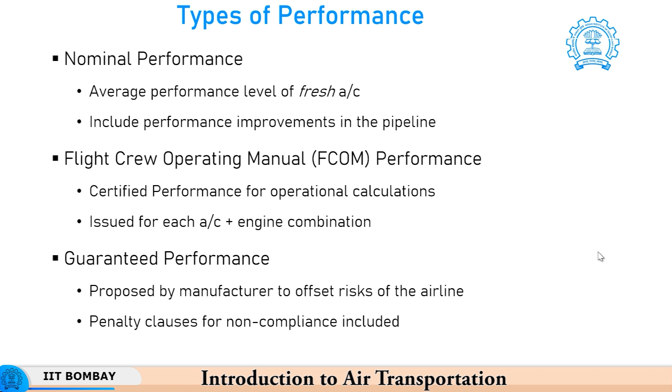Let us look at how these two types of performances are related and what is done. If you look at critical performance, there are certain parameters. When we calculate the critical performance of the aircraft, we assume the aircraft to be full with 100% load factor, the payload also full with the maximum certified payload, the cargo also completely full, and the ambient wind and outside air temperature, abbreviated OAT, to be about the 85th percentile.

You look at the data over a large period of time and pick the ambient wind and OAT that is almost always present around 85% of the time. With this assumption, we calculate the critical performance. But if you want to calculate the average performance, that is essentially to demonstrate the ability or capabilities of the aircraft in average operating conditions. There we assume the load factor to be 75% both for passengers and payload, only half the cargo is carried, and the winds are within the 50th percentile.

So when the critical performance is mentioned, we assume the most critical conditions, and when the average performance is mentioned, we use these average conditions.

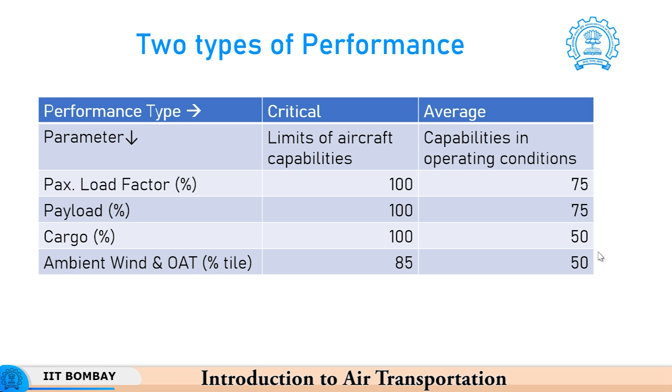Let us have a look at what is the effect of the en route conditions on the performance of an aircraft. One very common occurrence is that the outside air temperature may increase above the standard ISA conditions. So as the OAT increases, the engine performance goes down and the climb rate of the aircraft also is reduced.

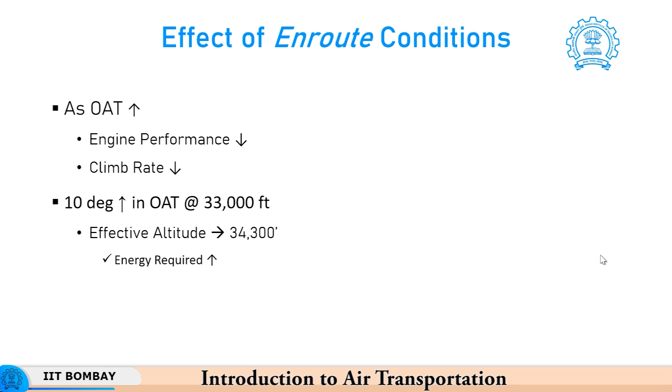A very rough idea is that suppose you have a 10 degree increase in the outside air temperature at the operating altitude of 33,000 feet, then effectively the aircraft has to climb to a height of 34,300 feet. So the notional increase in the altitude to be climbed is 1,300 feet. In other words, the energy required by the aircraft when it operates at 33,000 feet in a condition when the outside air temperature is 10 degrees more than the nominal ISA value, is equivalent to expecting the aircraft to climb to a height of 34,300 feet.

Now during climb also there are issues. As the ambient velocity increases during the climb, the angle of attack during climb, alpha climb, and the flight path angle are a bit different. The flight path angle is the angle of the aircraft related to the flight profile, and alpha climb is the net angle at which the aircraft is climbing. Both of them increase, so you have to climb at a higher angle, and when you climb at a higher angle, the distance required on the ground to complete the climb also increases. So the climb will take longer if the ambient velocity increases.

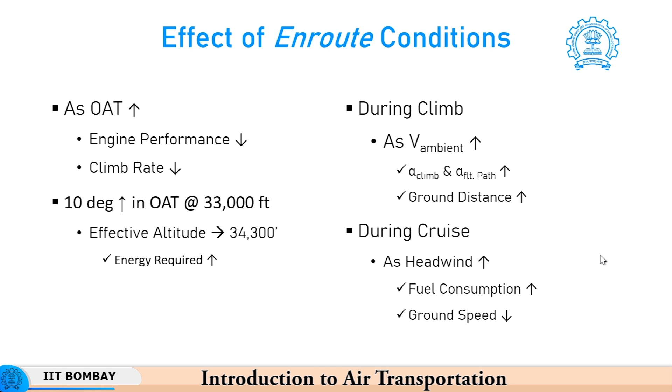During cruise, you have either headwind or tailwind. Headwind means the air is coming against the aircraft at some relative speed. As the headwind increases, you have higher fuel consumption, and you fly slower compared to what appears to the ground. In other words, if an aircraft is flying at an actual cruise speed of 400 knots and it faces a headwind of 10 knots, effectively you are flying with respect to the ground only at 390 knots. So the ground speed will reduce.

That is why we define something called the equivalent still air distance, to take into consideration the effect of headwind or tailwind during the cruise. The equivalent still air distance is the ground distance travelled by the aircraft when there is no headwind or tailwind, zero wind conditions. The formula for estimating the ESAD is straightforward: you multiply the true airspeed with the actual ground distance and divide it by the true airspeed plus or minus the wind. If we have a headwind, we use the minus sign; if a tailwind, we use the plus sign. TAS stands for true airspeed and GD stands for ground distance.

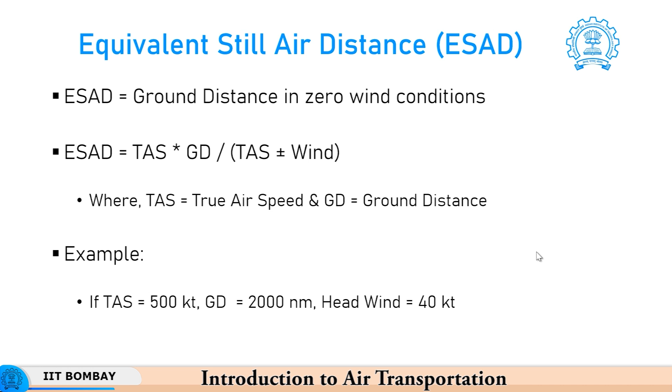As an example, suppose we have an aircraft cruising at a true airspeed of 500 knots and the ground distance is 2000 nautical miles. Suppose this aircraft is continuously facing a headwind of 40 knots, then the ESAD will be 500 into 2000 divided by 500 minus 40, which is 460, giving an answer of 2174 nautical miles. So practically speaking, it would have traveled 174 nautical miles extra if there was no headwind. That is why we define the term equivalent still air distance.

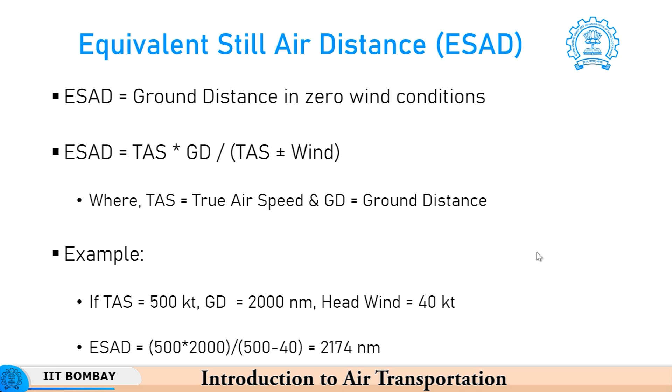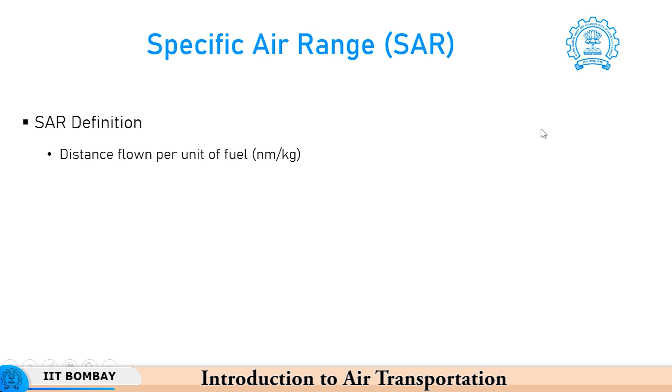Let us look at a very interesting term called the specific air range or SAR, which is important when comparing two aircraft for their cruise performance, or even looking at the same aircraft and how its specific air range changes. SAR is defined as the distance flown by the aircraft per unit amount of fuel, normally expressed in nautical miles traveled per kilogram of fuel. It depends on various factors, like how heavy the aircraft is during cruise, at what altitude you are cruising, and at what Mach number you are cruising. All of these parameters, along with ambient weather conditions, determine the specific air range.

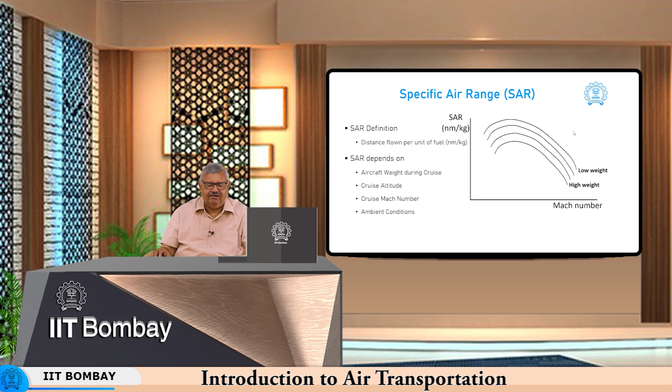Let us see the effect of Mach number at a specific altitude and weight on the specific air range. If you have an aircraft at low weight condition, the lines are almost parallel moving towards high weight. The maximum point of these graphs is the maximum range cruise condition. So if you want to obtain maximum range in cruise conditions, you have to fly at that particular combination where the curve has a peak. As you can see, the Mach number for maximum range cruise increases as the aircraft becomes heavier, so a lighter aircraft obtains maximum cruise range at a lower Mach number compared to a heavier aircraft. This assumes that the cruising altitude and outside air temperature are the same in all conditions.

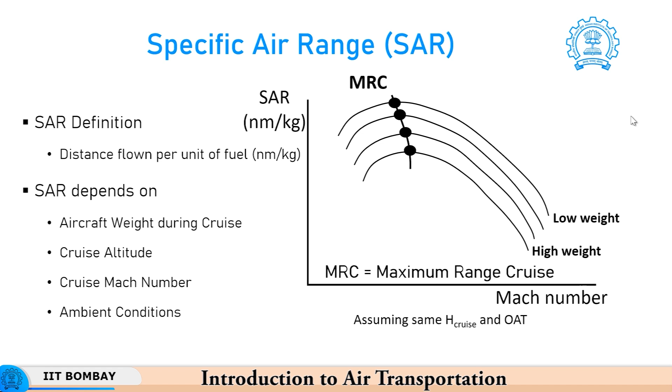There is also a concept of long range cruise, or LRC. You take the condition for MRC, which has a particular specific air range, and find out how much improvement in Mach number you can get if you reduce or compromise on the MRC by 1%. If I accept a 1% reduction in specific air range, I get some improvement in Mach number, usually around 5%. If a heavier aircraft can fly at a higher Mach number, that's better, because it reduces the time required. This is the concept of long range cruise.

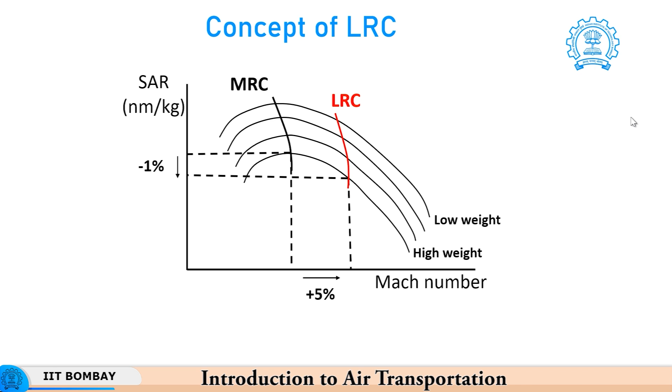So the LRC is obtained at the Mach number which gives you 1% lower specific air range compared to the MRC.

MRC and LRC have a very important and interesting trade off between the two. MRC is definitely the most efficient cruise because it gives you the higher specific air range at each weight. So when you are only concerned about fuel consumption in cruise, MRC is the recommended condition, but it is very difficult to maintain, because you need to constantly adjust the thrust to generate the right amount of thrust to maintain the Mach number.

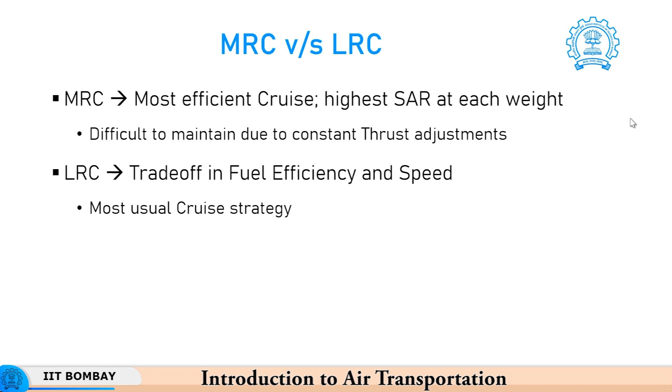Now LRC is the trade off. Aircraft are meant to fly from destination A to B, and passengers are not necessarily concerned about the operating efficiency of the airline, they are concerned about getting there fast. So if you want a trade off between fuel efficiency and speed, you use the LRC. This is the most usual strategy followed by airlines during cruise, because LRC gives you a stable cruise flight without any need for the pilot to constantly adjust the thrust.

Why is it so? Suppose we reduce the speed of the aircraft flying at LRC - the drag will reduce, and as the drag reduces, the speed is automatically maintained. On the other hand, if we increase the speed from the long range cruise speed, the drag will increase, and as the drag increases, the speed of the aircraft will automatically reduce. So without great thrust adjustments by the pilot, one can maintain LRC, along with a trade off between fuel efficiency and time required for the flight because of higher Mach number. LRC is normally preferred.

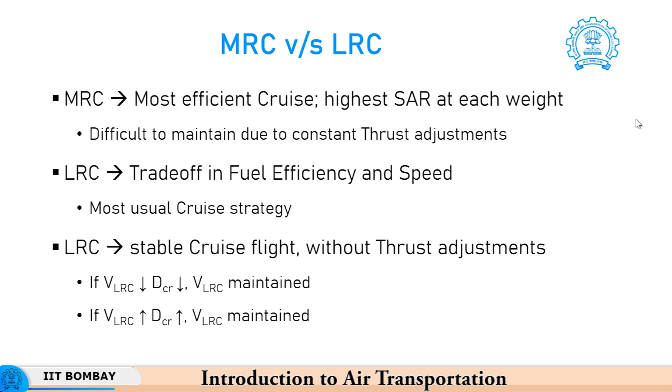There is also another option called minimum time cruise. What is the definition of minimum time cruise? This is the Mach number to fly at which the total trip time is minimized. Generally MTC is done when you are already recovering from a previous delay and want to reach the destination faster, because otherwise connecting passengers might lose their connections. So to allow connections at hub airports, we sometimes compromise on fuel efficiency and go for the minimum time cruise.

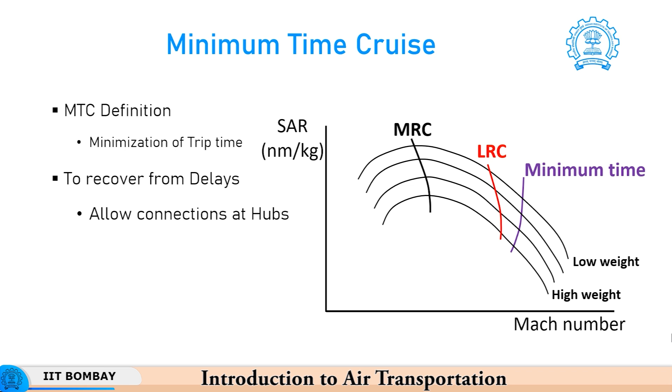As you can see, the graph on the right hand side shows you the MRC and the LRC which we have already discussed. Another point is the minimum time, which can be at a higher Mach number compared to even the Mach number for LRC. Many times the airline does not look at only the operating cost or fuel minimization, they look at total cost. So let us see the total cost consideration.

When you are bothered about only the minimization of fuel cost, then you will fly at the MRC, because the trip cost is going to be the lowest when you fly at MRC if fuel cost is the only consideration. However, as we have seen, flying at MRC means you fly at a lower speed. Now, if you look at certain fixed costs of the aircraft, they are fixed and do not depend upon the speed at which you fly. Then there are some time related costs.

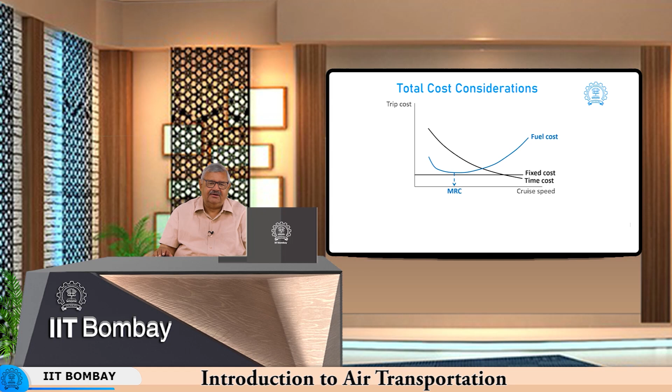These time related costs reduce as your speed is increased, because you will have less time. For example, the allowances paid to the pilot based on hours of flight. For short haul routes it may not matter, but for long haul routes with 8-hour flights, there can be a substantial difference between the time cost related to low speed flight and high speed flight.

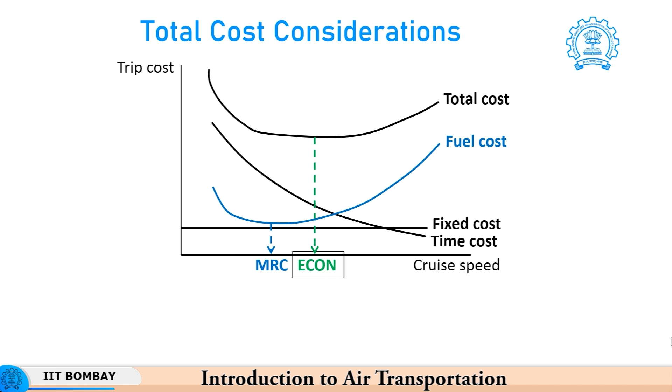So, in general, as the cruise speed or Mach number increases, you will have lower time related costs. If you add these two costs, the fuel cost and time cost, you get a curve which gives you the minimum total cost, and that may have a different minimum as compared to the MRC. So, that is called the economical operating speed.

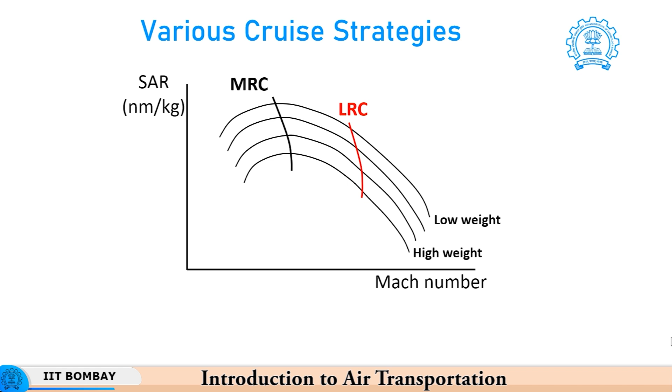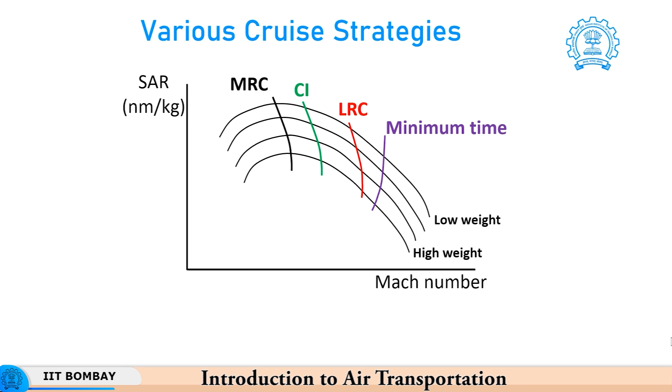So, there are various cruise strategies as we have seen. There is the MRC, when you look only at minimizing fuel consumption by maximizing the specific air range. There is the LRC, where you agree for a 1% compromise on the SAR to get better, higher cruise Mach numbers. There is also a minimum time cruise, where the aim is to fly such that you can have the fastest flight, but not necessarily at such a high Mach number that your SAR becomes very poor. And then you have the cost index condition, where you look at all the costs, time related costs, fixed costs and fuel costs, and then get the optimum operating Mach number.

Let us also now look at how an alternate airport is selected. It could be one airport or it could be many airports. First of all, we need to have in mind some alternates, because it may not be possible for us to land at the desired destination airport.

Why is it not possible? There could be many reasons. One common reason is poor weather conditions prevalent at the destination airport. Then it is possible that there are some obstructions on the runway, because of which the airport is temporarily unavailable. So, when you come in to land at your destination airport, you may not be permitted to land because the runway assigned to you is not available.

So, it is very important to select the alternate airport correctly and appropriately, because you can have a lot of operational issues if you do not do it properly.

Moreover, the selection of which airport is correct as an alternate depends on weather. It should not be located where the weather is very similar to the destination airport, because if you are diverted due to weather from New Delhi, for example, and you choose Lucknow as the alternate, maybe the weathers are very similar. So, the chances of diversion again from Lucknow will be very high.

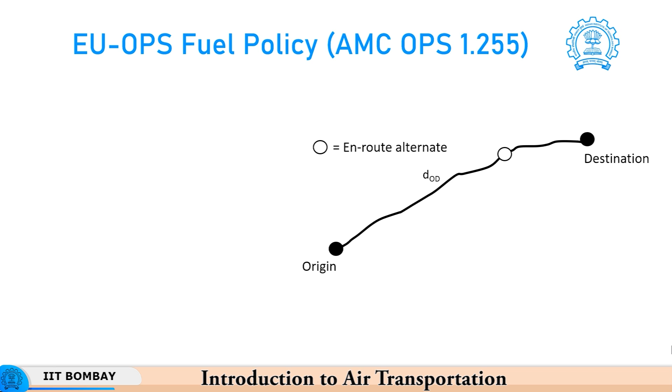Then you have to identify an alternate airport en route, where you will divert in case of any issue. Now the reserve fuel to be carried is specified as 5% of the total fuel, or it can be 3% of total fuel, provided certain conditions are met.

What are these conditions? The radius of the location of this alternate has to be not more than 20% of the total distance, and the location of the destination and the alternate should be within some limits. These limits could be 25% of DOD, or 20% of DOD plus 50 nautical miles, whichever is more.

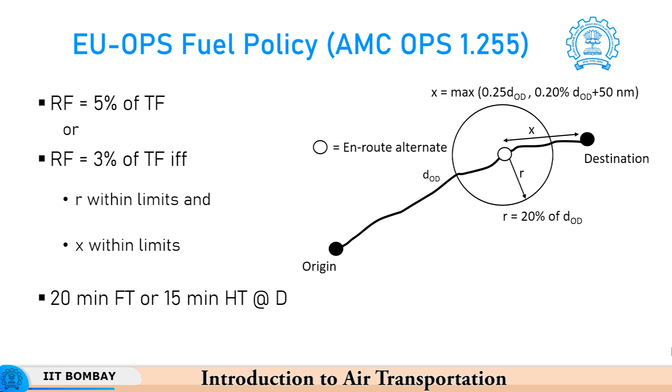Another option is to specify that the reserve fuel will be such that you can have 20 minutes of extra flight time, or 15 minutes at the destination.

Diversion. Diversion is something no one likes, neither the airline, nor the crew, nor the passengers, but it can sometimes be enforced. What is diversion? Diversion means that you are not able to land at the planned destination airport. There are certain reasons for it, some very common and some very uncommon, but they are there.

Amongst the common reasons, the most significant and most prevalent reason for diversion is poor weather, which generally results in poor visibility at the destination airport. Therefore, the aircraft is not able to operate safely.

The other reason that is quite common is if there is a medical issue on board, either with the passengers or with the crew members, that cannot be handled by the crew members and it becomes a medical emergency. So you have to quickly divert and land so that the passenger's life is not at danger.

The third possibility is technical issues with the aircraft. There can sometimes be issues because of which the aircraft is either going to come back to the origin or discard the flight path and divert to some other airport to take care of the technical problem. During flight you have a minimum equipment list, the MEL, with which you are allowed to fly. If an item on that MEL is working on the ground but becomes inoperational during flight, then you are not able to operate safely, so you have to immediately divert. This is also one common issue.

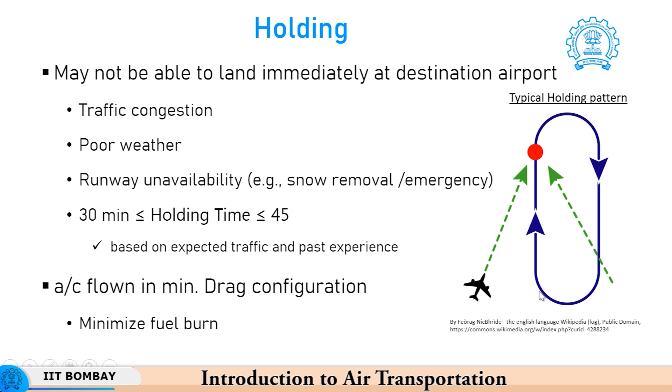For example, the red dot that you see in this figure is some navigational fix at the airport. So, the aircraft which are approaching the airport and are asked to hold will actually go towards this fix and then follow this particular kind of right hand circuit, continuously flying in this pattern. If there are many aircraft, they may be stacked one over the other with some altitude difference, and they may all be doing these flights in a continuous stack.

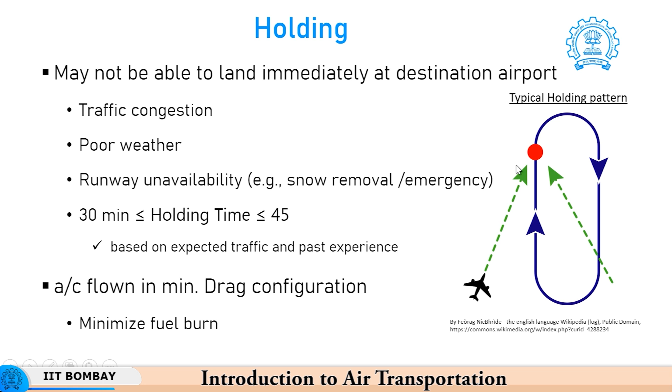So, the distance of this stack and its length, etc., it is all pre-decided and known. It is available to the pilot in the navigation charts. Roughly about 4 minutes are taken by a typical aircraft to do one particular round. So, you keep on flying in circles like this, or in oblong circles like this.

One very interesting operational scenario is when you are operating to an island in the middle of nowhere. The reserve that you carry when you operate to an island is called island reserve. They are far more than the reserves used for normal operations. Let me give you an example.

It is very critical if you operate to an island as a destination that you plan the operations carefully, because if there is a problem, there is no alternate airport nearby — you may have to actually come back to the origin or go to a location far away. Therefore, very accurate weather forecasts and continuous monitoring are required more critically when you operate to an island.

Let me give you an example. Generally, when flying to an island airport which is in the middle of nowhere, you have to carry reserve fuel for at least 2 hours of additional flight.

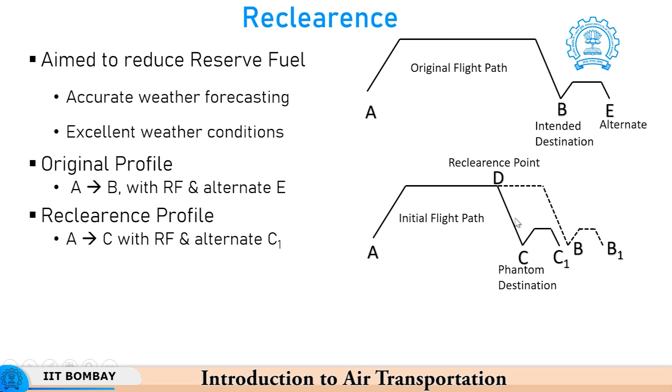At that point you look at what has happened so far. If you find that you have not consumed the extra fuel you carried, you can use the remaining part of the reserve fuel to actually travel toward destination B and also have fuel for the alternate. So, in the reclearance profile, you file a flight plan saying you land at phantom destination C and carry reserve fuel for flight from A to C and C to C1 alternate diversion.

Now, interestingly, if you look at the two scenarios: the trip fuel from A to C, which is in the reclearance, plus 5% allowance from A to C, plus diversion from C to C1 - this is one scenario, you add these numbers. If these numbers are equal to the trip fuel from A to B, 5% allowance from D to B (the reclearance point to B), and the diversion from B to B1, then if these two are equal, you could end up carrying a lower amount of reserve fuel.

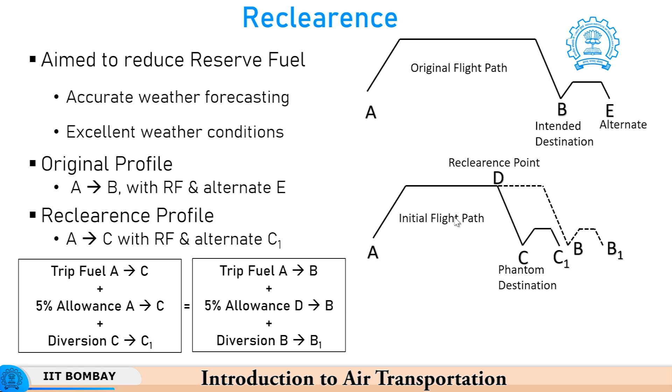Another interesting aspect in airline operations is called tankering. What is tankering? In tankering, we do not carry less fuel, we carry more fuel than needed. Why tankering? Because we do not refuel the aircraft at the destination airport. Why? Because it might be possible that the kind of fuel you need is not available at that airport, or you want to reduce the turnaround time in multi-leg flights, because filling fuel in the aircraft is one of the large components of turnaround time, and if you don't need to refuel, you can quickly turn around.

This is very common in commuter aircraft which fly from A to B, B to C, C to D, multi-leg elements, and then come back to origin. They have reasonably good fuel capacity to go a long distance, but are used by the airline for multiple short legs. So, they have enough fuel for all the legs - they fly with fuel for all legs and do not refuel at each destination. Another reason could be that fuel supply may be available at the destination airport, but much more costly than your origin or some other airport. So, you do not want to buy fuel at a costly rate. Therefore, you carry additional fuel, or uplift fuel at a location where it is much less expensive.

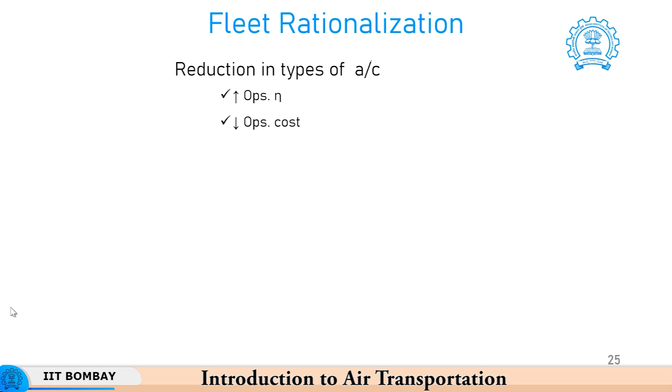If you have less number of aircraft, take the extreme case of some airlines who are interested in operating only one type of aircraft, such as Southwest Airlines. They have taken a policy that we will operate only one type of aircraft, so they place orders for a large number of aircraft of a particular type. So every aircraft can be operated by any crew member, both in the cockpit and in the cabin, and can be maintained by any maintenance engineer. So they say that we have commonality to the extent that we do not go for any multiple type.

But that is another extreme. Now there is always a movement towards consolidation nowadays. What is this movement?

If you have a consolidation, then you have a lower propensity to accept innovation, and also a lower propensity to implement advanced technology. So there is a balance for a normal airline, there is a balance.

There is an important issue regarding fleet commonality which also affects many a times the fleet planning decisions. Fleet commonality helps in streamlining and simplifying the operations of an airline, both from the flying and the maintenance point of view. If you have identical cockpits and identical operations procedures, then it allows mixed fleet flying, which I will explain in more detail a little bit later.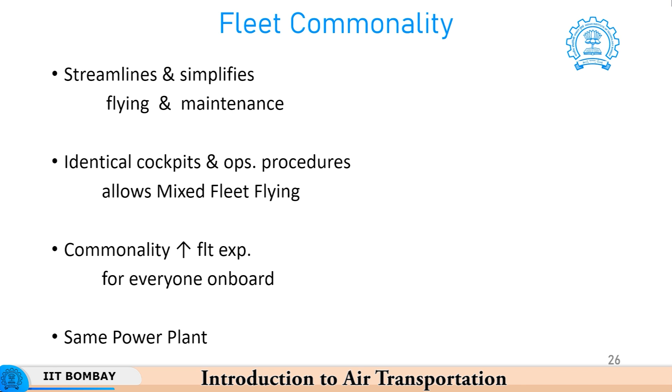Commonality also improves the flight experience, because for everybody on board, when they fly, they know that we are using the same aircraft, same power plant. It also helps many a times in maintenance.

There is one very interesting scheme which Airbus had introduced called the cross crew qualification. The idea is that any flight crew member qualified on an Airbus aircraft can fast track their qualification to another aircraft. Compared to this, other operators or manufacturers need much more time to train a pilot from one aircraft type to another, so the training costs increase. For example, Airbus says that from A320 to 330 to 340 to 350 to 380, or any direction, you can move very fast.

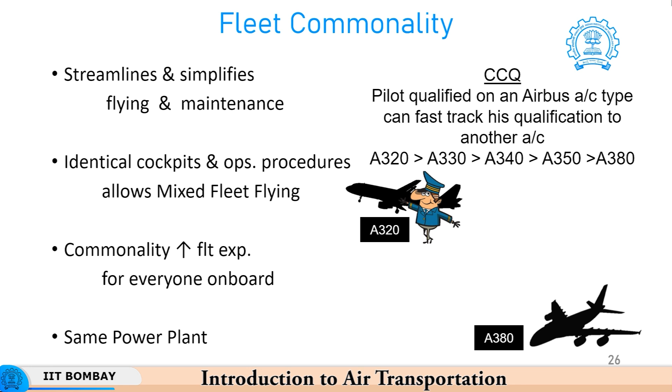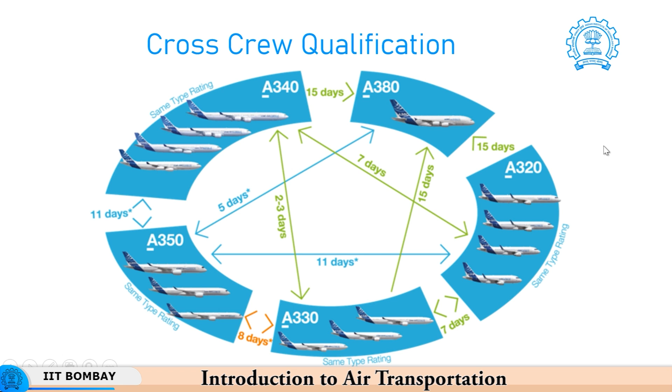A pilot who is operating Airbus A380 can then operate Airbus A320 because the differences in the cockpit are very few. Here is an example of the same type rating for a particular group of aircraft and the time needed for training. If a pilot is qualified for Airbus A350, and there are some A380 aircraft in the same type rating, it will only need around 5 days to convert to A380 and vice versa. This reduces the cost incurred by the airline in getting their crew members trained.

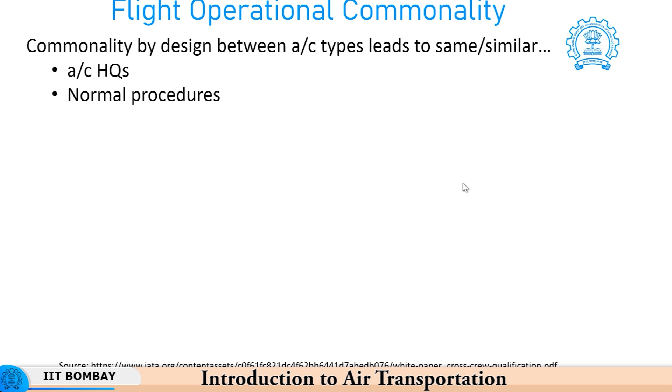This can also lead to operational commonality by design. If you have similar aircraft in your fleet, you have similar handling qualities, and your procedures are very similar when you fly. The process used for crew discipline during abnormal emergencies is also the same.

During an emergency, if you are used to a particular procedure and it is the same for all the aircraft, it becomes very easy because you have less chance of making mistakes, and you can share the task very easily. This benefits the airlines and pilots, helping them get licenses better.

You can have things like the same type rating, called STR. A single license can be used as an endorsement for related aircraft sharing the same type certificate. The aircraft may be a bit different, but they have the same type rating, so a pilot qualified on one is qualified to fly the other.

Then you have the common type rating, CTR: a single license endorsement for related aircraft having separate type certificates. Although there are separate type certificates, because of the commonality you can have a common type rating, or cross crew qualification, so the transition is shortened instead of full transition training to acquire a particular type rating.

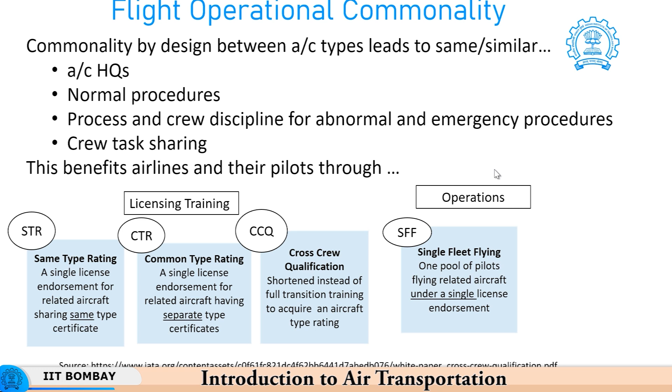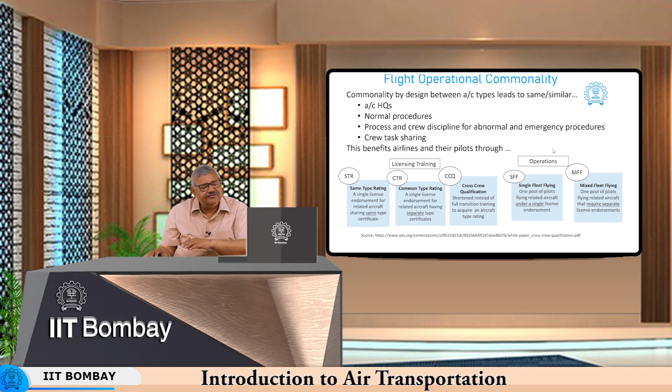Another option is that during operations there could be benefits. For example, single fleet flying, SFF, means one pool of pilots flies a related aircraft under a single license endorsement. Mixed fleet flying, MFF, means one pool of pilots flies related aircraft that require separate license endorsements, but they fly together because of the differences. So whether in licensing, training, or operations, you see improvement when you have commonality.

Finally, let us look at the trend towards leasing aircraft rather than owning them. If you are a small carrier and lack the cash or financial wherewithal to buy a few planes, you can manage to enter and exit the business relatively easily by leasing them.

For example, Air India has leased a lot of aircraft earlier from ILFC, and Jet Airways has leased a lot of aircraft from GECAS. These are two major leasing companies.

Leasing also has various types. There is dry leasing. In dry leasing, you only take the physical aircraft. You have your own crew members and your own maintenance staff.

Then you have wet leasing. In wet leasing, you take everything from the lessor. The pilots come with the aircraft, the crew members come with the aircraft, and even the maintenance is outsourced. You are only looking at operating the system.

Then there is, in between, damp leasing, which is neither wet nor dry, it is damp. So it could be a combination of these. There are two kinds of lease, the operating lease and the financial lease. Let us see the difference between these two.

In the operating lease, the ownership of the asset, that is the aircraft, is retained by the lessor or the leasing company at the end of the lease. So it is like the airline is simply borrowing the product, using it and returning it back. Any risk to the value of the aircraft is borne by the lessor or the leasing company.